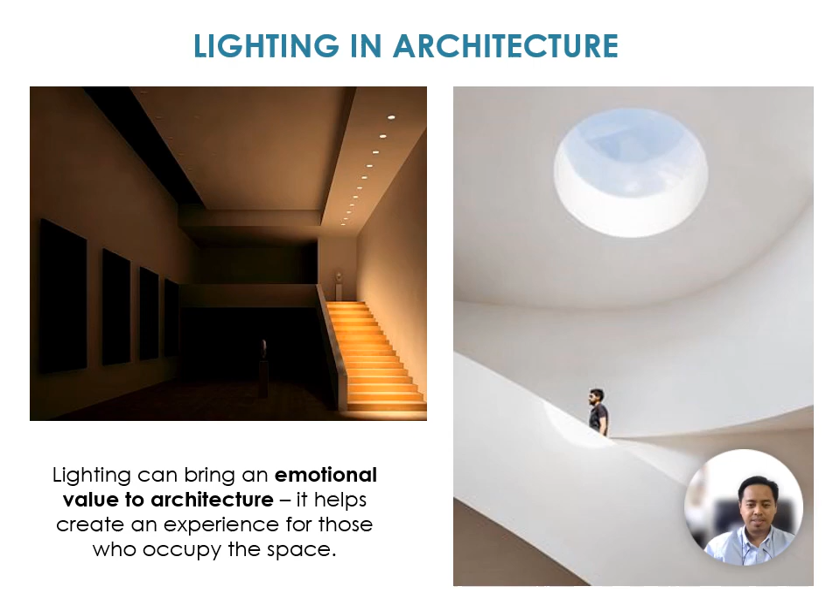Lighting can bring an emotional value to architecture. It helps create an experience for those who occupy the space. Whether it's daylighting or artificial lighting, light draws attention to textures, color, and forms of a space, helping architecture achieve its true purpose.

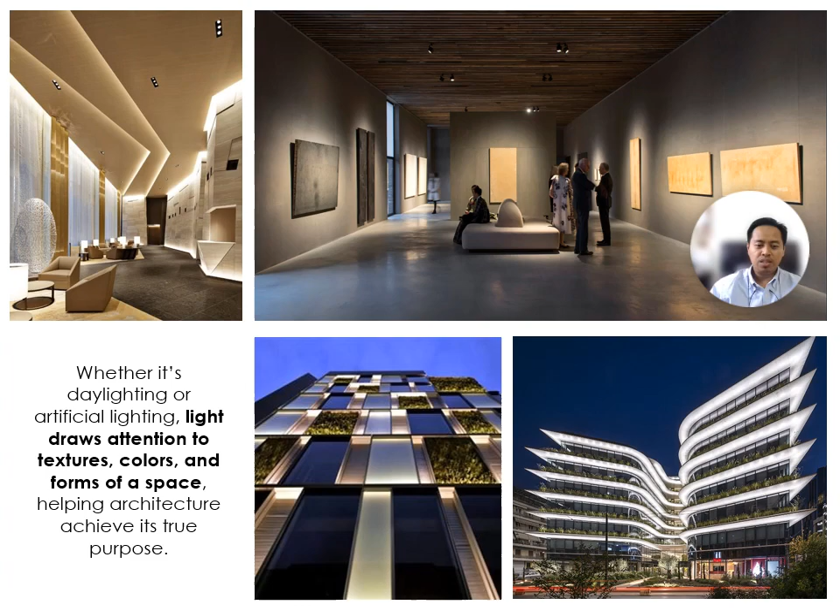Consideration of lighting in architecture. There are three key aspects to consider in order to determine architectural lighting. The first one is aesthetic, second is function, and the third is efficiency.

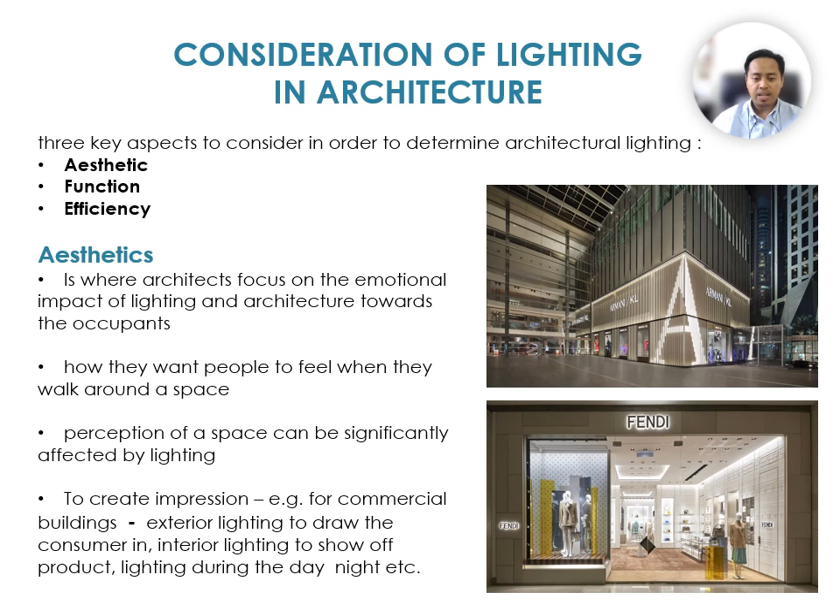Let's talk about aesthetic first. This is where architects focus on the emotional impact of lighting and architecture towards the occupants, how they want people to feel when they walk around the space. Perceptions of a space can be significantly affected by lighting, to create impressions. For example, for commercial buildings: exterior lighting to draw the consumer in, interior lighting to show off the products, lighting during the day and night, etc.

Next is function. This refers to any aspect which improves one's ability to live, work, function, relax, or play, to make the space easier to use. Designing lighting should relate to the specific purpose or multiple purposes of a particular space or building, for example kitchen, shopping mall, home theater, bedroom, fire station, and museum. Different purposes, different focus, therefore require different lighting design.

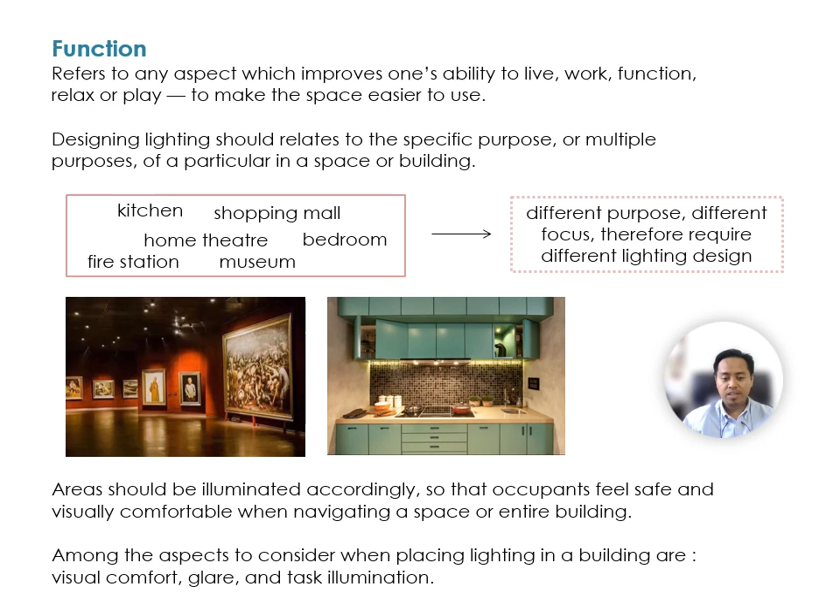Areas should be illuminated accordingly so that occupants feel safe and visually comfortable when navigating a space or entire building. Among the aspects to consider when placing lighting in a building are visual comfort, glare, and task illumination.

Next, efficiency. Lighting in some environments makes up a significant part of the energy usage due to the nature of the lighting required and the extended hours of operation. Energy efficient improvements create further savings while reducing carbon emissions, ensuring that light is optimally used and distributed.

An easy way is to choose LEDs instead of fluorescent lighting, as there is less wasted light with LEDs than fluorescents due to the directional nature of LEDs.

As designers, it is important to consider overall factors including the purpose of the building, purpose of lighting, quality of lighting needed, the frequency of use, and the environment in which the lighting is being used, for example either outdoor or indoor. This can be done by ensuring the majority of the light is reaching its purpose and there is less wasted light.

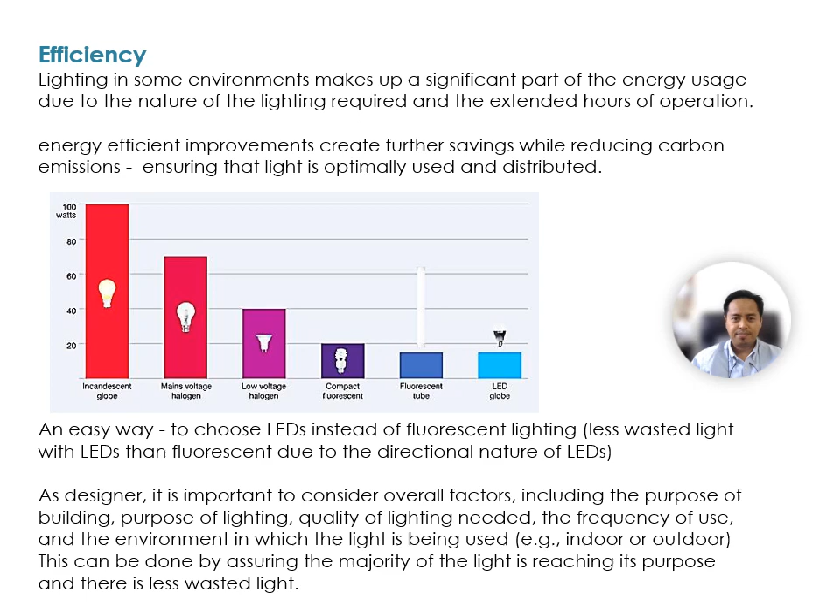In short, architectural lighting is an illumination for building design and space function. It integrates architecture, design, and engineering. Lighting can visually enhance or even destroy a space. It applies to functional aspects that improve users' ability to live, work, function, relax, or play, plus human needs and building aesthetics. It has physical, psychological, and physiological effects towards the user.

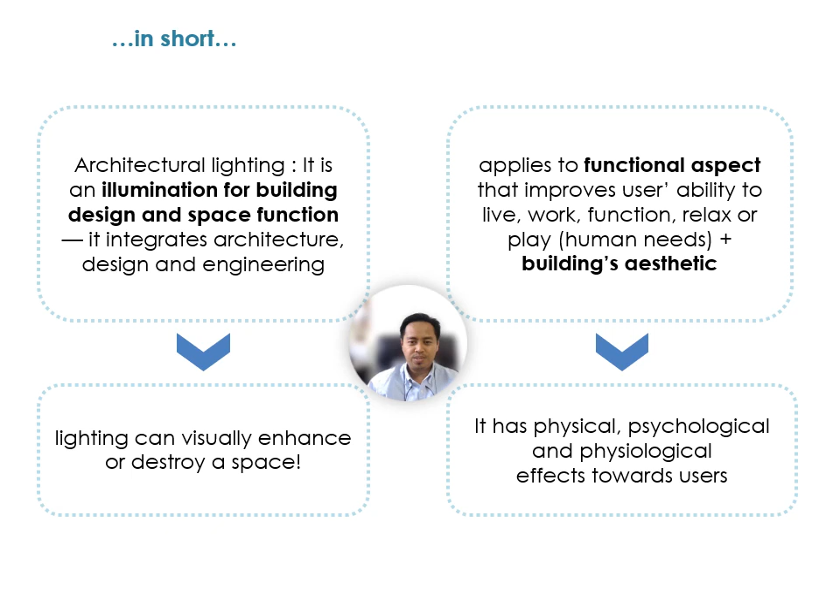Let's move on to the types of lighting distribution. Basically, there are three types: the first one is ambient lighting, the second is accent lighting, and the third is task lighting.

Ambient lighting, also known as general lighting, provides illumination for the entire room or space at a uniform level, radiating a comfortable level of brightness without glare. It can be accomplished using basic lighting fixtures such as chandeliers, downlights, wall lighting, and fixtures.

While accent lighting highlights a specific point of interest or architectural feature, very concentrated light to focus on a focal point, for example sculpture, wall, textures, or even walkways. It may be its own unique design element that is the showpiece of the space.

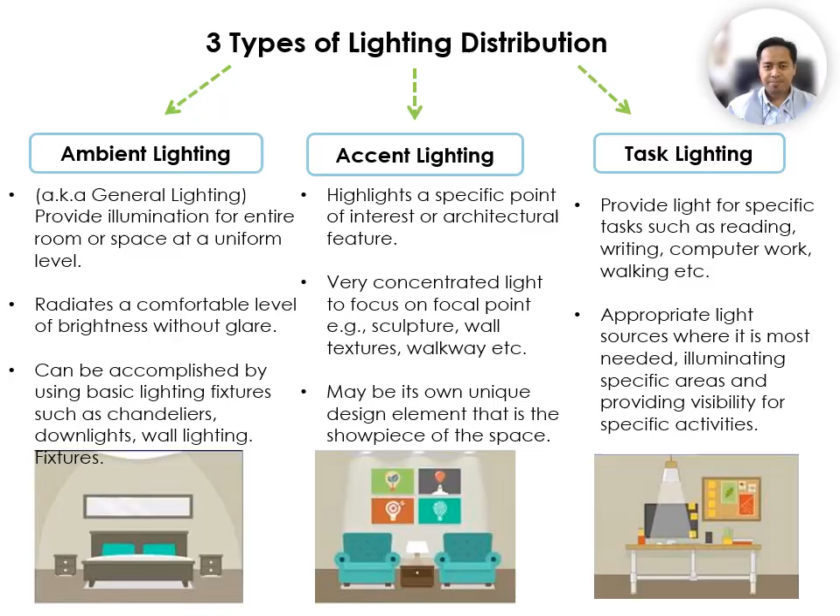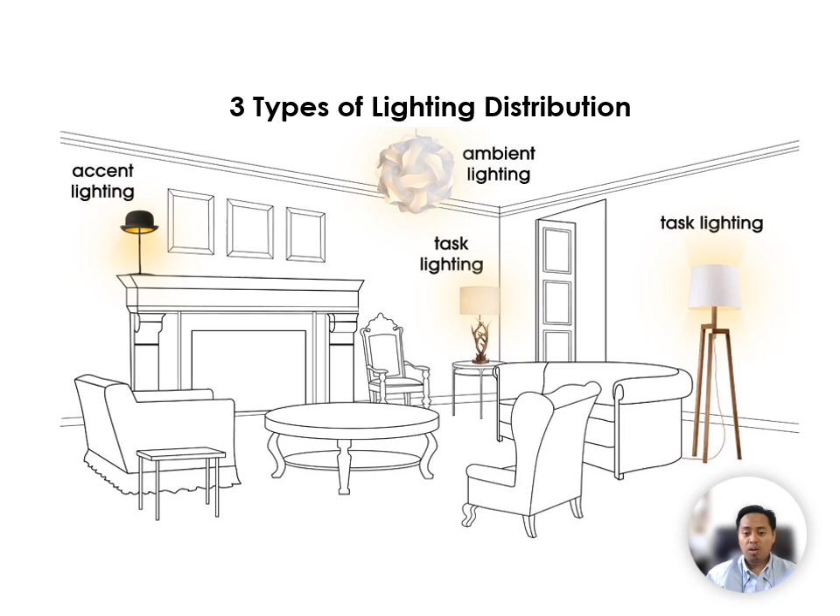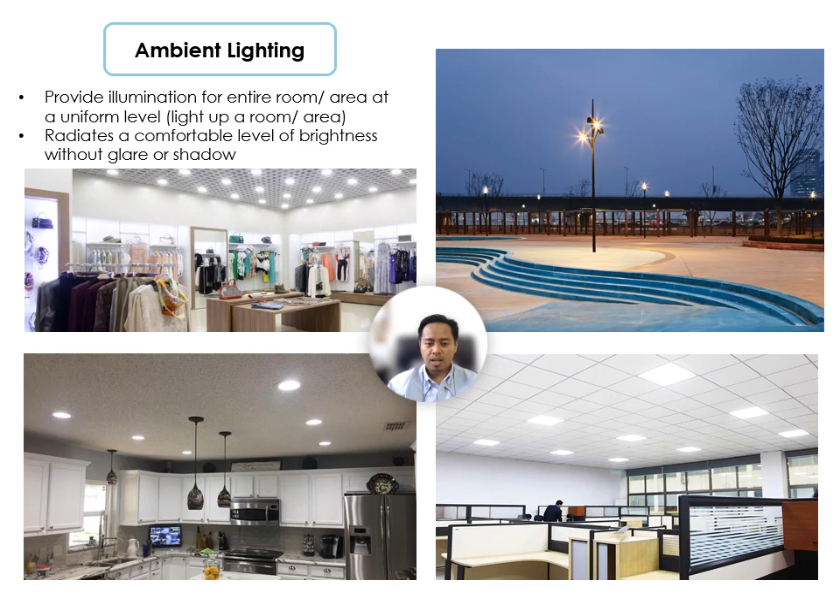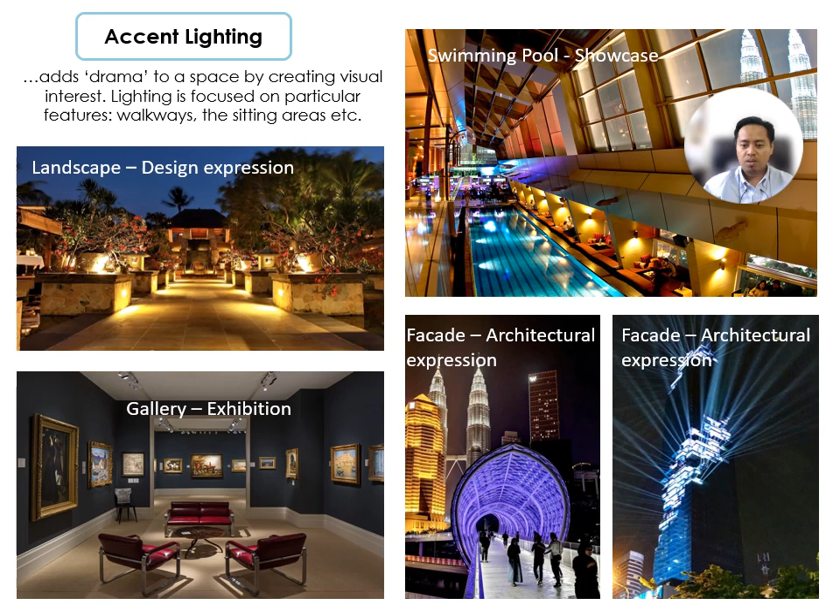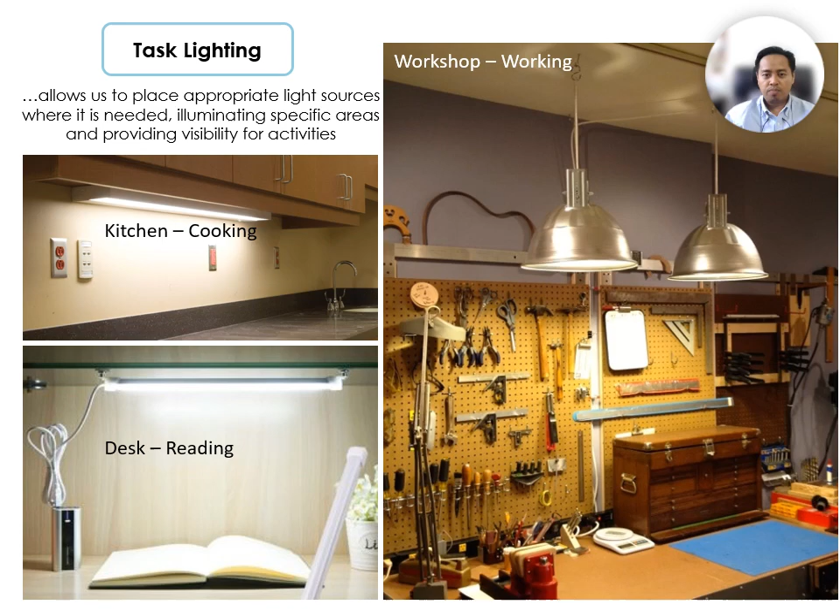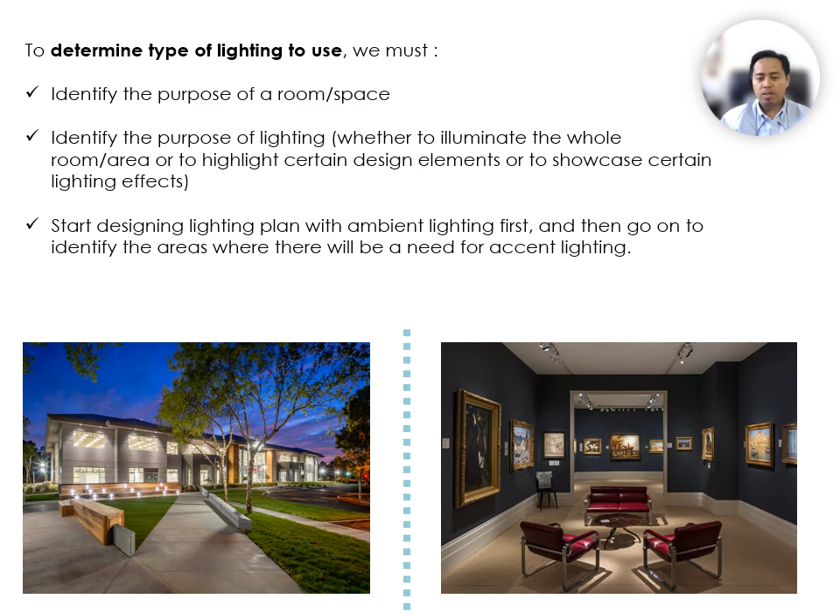To determine the type of lighting to use, first we must identify the purpose of a room or space. Next, identify the purpose of lighting, whether to illuminate the whole room or area, to highlight certain design elements, or to showcase certain lighting effects. Start designing the lighting plan with ambient lighting first, then identify the areas where there will be a need for accent lighting.